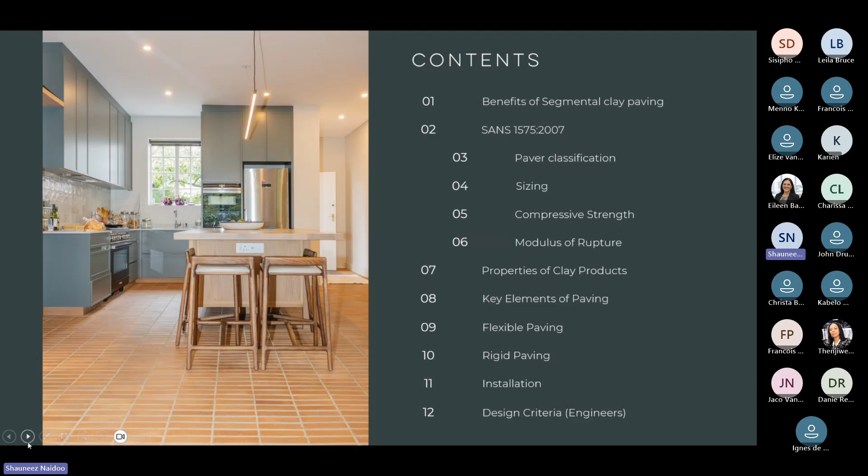So the benefits of clay segmental paving. Just like our normal face bricks, we're talking about clay as a product, and there are so many benefits. I can talk for days about the benefits of clay, but to mention a few: the natural and sustainable nature of clay as a product, the timeless and aesthetic appeal it gives, and the rich and permanent fade-free colors that we are able to offer. It also boosts your property value, as well as offering versatility, as you can use it both indoor and outdoor. Maintenance will always be a very big pro of clay - it's maintenance-free, resistant, and naturally slip resistant, as with our pavers. There are endless properties we could go on about for days.

So SANS 1575, we're going to cover that in about 3 slides. What is SANS 1575? It's the South African National Standard for burnt clay paving units. SABS is the South African Bureau of Standards, responsible for regulating the quality of South African goods in terms of the SANS 1575 standard.

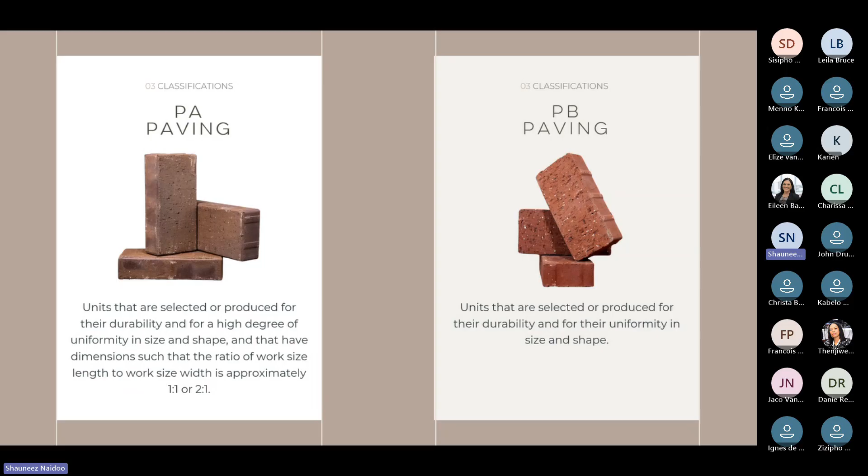So, which is very important, is the different classifications of your paving. We've got 2, your PA paving as well as the PB paving. The PA paving units are selected or produced for their high durability and degree of uniformity in size, shape, and dimensions that work in a ratio of length to width of approximately 1:1 or 2:1. Our PB range is basically units that are selected or produced for the durability and for the uniformity in size and shape.

So the difference between the 2 units, according to SANS 1575, which is not a Corobrik standard: with regards to the PA, the units may have chamfered arrises, and the chamfer or sloped arris should be less than 7 millimeters from the nominal edge. The PB pavers shall have a uniform arrises that are not chamfered, and they also have spacer nibs, which are vertical protrusions on the faces to maintain joints of less than 3 mil.

We purposely include this in our manufacturing process to allow for that joint, so that pavers are not butt jointed against each other, allowing for flexibility and movement. Units must be well fired and free from cracks, edge and corner damage, and this applies to both the PA range and the PB range. Specifically on the PA range, SANS 1575 says it has to have or may have a chamfered arris, but it's also available in straight edges as a specific request.

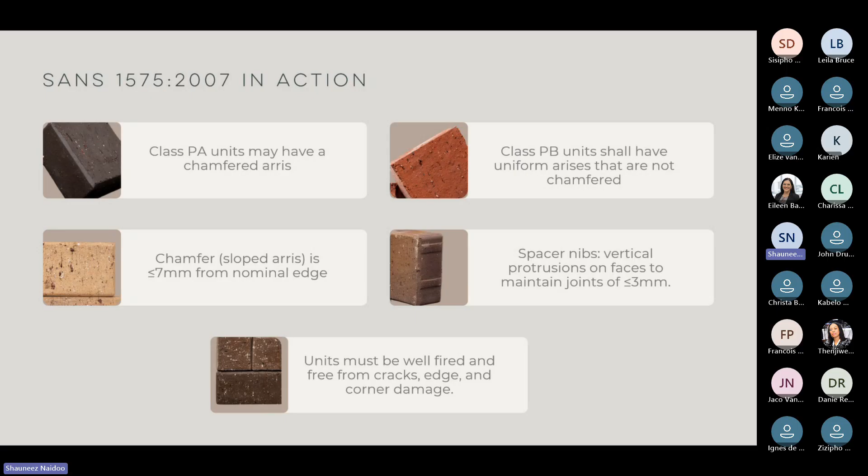So we'll go into the sizing of the 50 millimeter paving range. Basically, we've developed our pavers to be completely modular so that all pavers are interchangeable with each other. We'll start off with the doppio, which is 220 by 220 millimeters, as well as the modular, which is 220 by 108.5. So basically 2 modular pavers make up 1 doppio.

And then we've got the piazza, which is 220 by 52 millimeters, and 4 piazzas make up 1 doppio. Then we've got the cobble, which is 108.5 by 108.5 millimeters, and 4 cobbles make up 1 doppio, and 2 cobbles make up 1 modular. So you can see, you can play around with your layouts and you can go crazy. All these formats are available in the full range of paving.

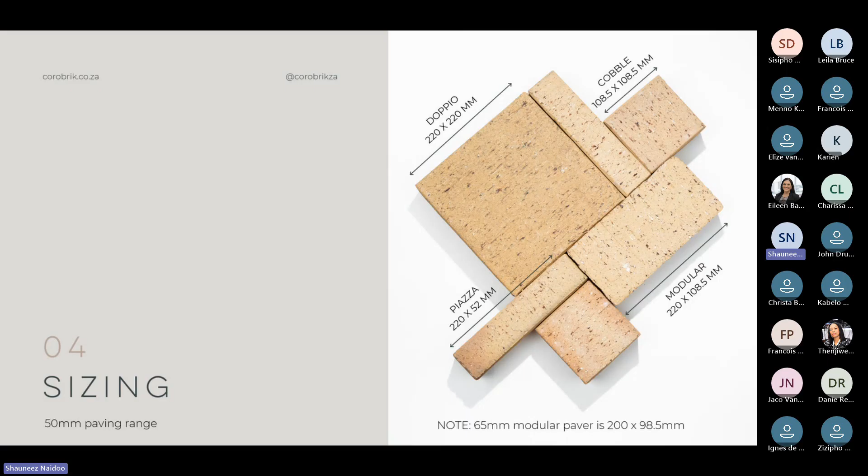So we'll touch on the size tolerances, which is for the PA as well as the PB, and this is similarly explained in the Facebrick ranges with your FBX, FBS, and FBA range. With regards to your PA and your PB, it is always important to account for these variances within the pavers, or the tolerances. With your PA, you have much tighter tolerances than your PB. What they state about the warpage is that it should not exceed 3 millimeters on a PA unit.

For PA, we don't really look at the individual units, we look at the average dimensions of 32 units. So with a PA, you are allowed to vary plus minus 2.5 mil in length, plus minus 1.5 mil in width, and plus minus 1.2 mil in height. And then for PB, it's plus minus 3 mil in length, plus minus 2 mil in width, and plus minus 2 mil in height. So you can see that variance.

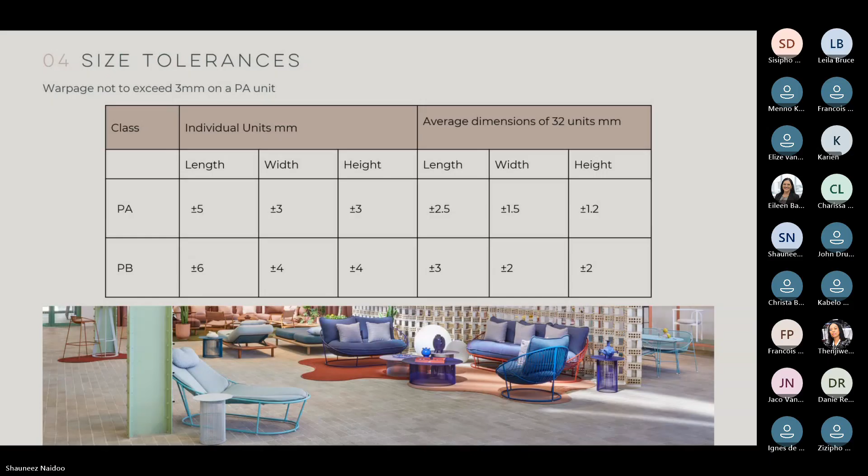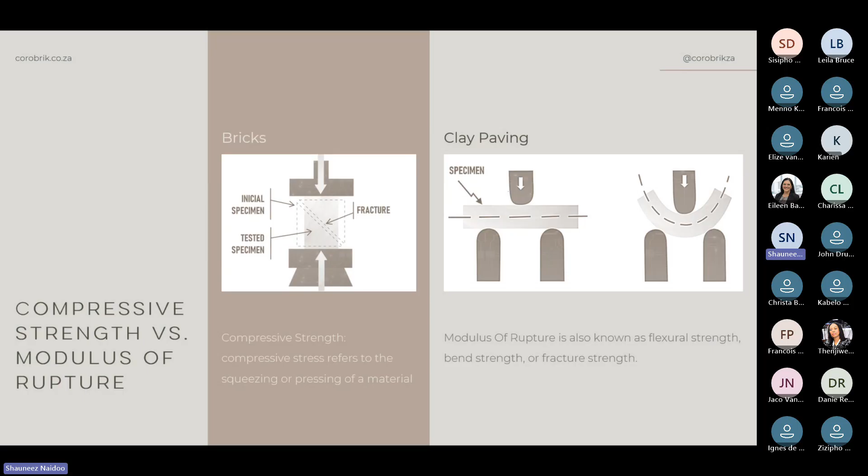Compressive strength versus modulus of rupture. A lot of other suppliers in the market test their pavers by compressive strength, and we do it by modulus of rupture. Compressive strength refers to the squeezing or pressing of a material, and we do compressive strength tests for our bricks. For the clay pavers, we do modulus of rupture, which is also known as your flexural strength, your bend strength, and your fracture strength, and that's obviously important for us when we're testing our clay pavers.

With regards to the modulus of rupture for PA pavers, the nominal modulus of rupture is 4 MPa, and the minimum individual modulus of rupture is 2.5 MPa. For PBs, it's 3 MPa for nominal modulus of rupture, and the minimum individual is 2 MPa. Everyone will obviously question that that looks a bit low, but you must just remember we're testing modulus of rupture.

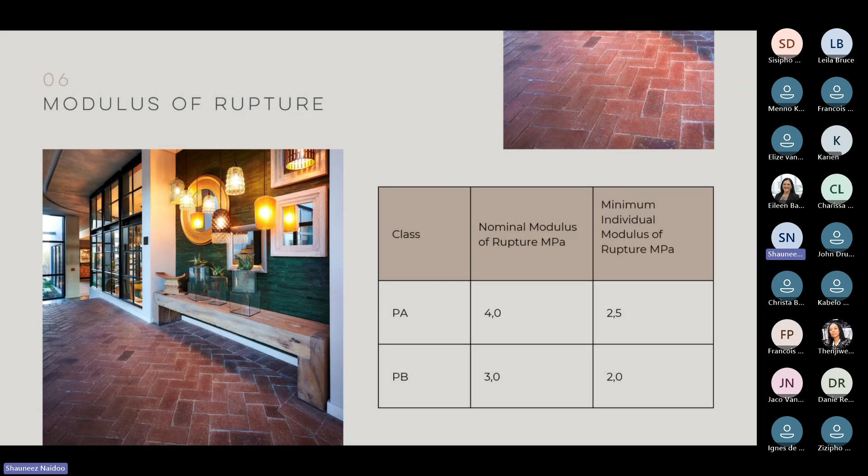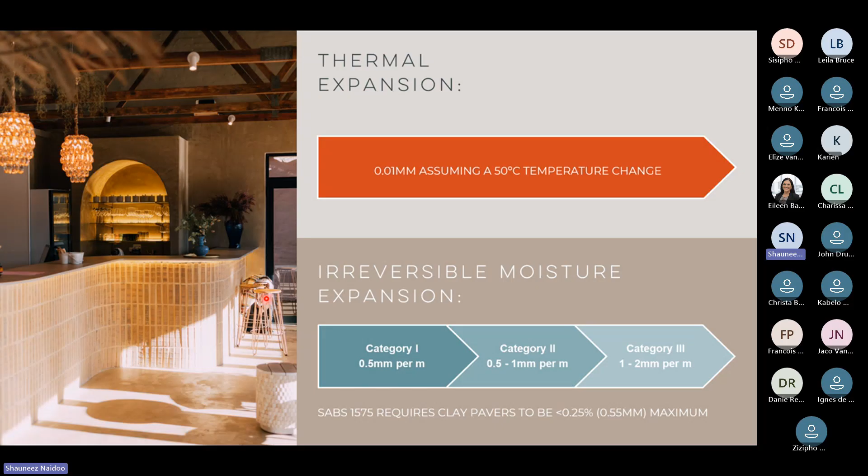The categories are divided into category 1, 2, and 3. Category 1 is 0.5 millimeter per meter. Category 2 is 0.5 to 1 millimeter per meter. Category 3 is 1 to 2 millimeters per meter. Remember, this is not our standard - this is the SABS 1575 standard.

Efflorescence - when you download a specification sheet, you will be given a degree of efflorescence. It will state either nil, slight, moderate, heavy, or serious, depending on the degree. Efflorescence is just a soluble salt. It is erroneously assumed to come from the brick or the paver, but we can test based on the specification sheet what exactly the efflorescence rating is.

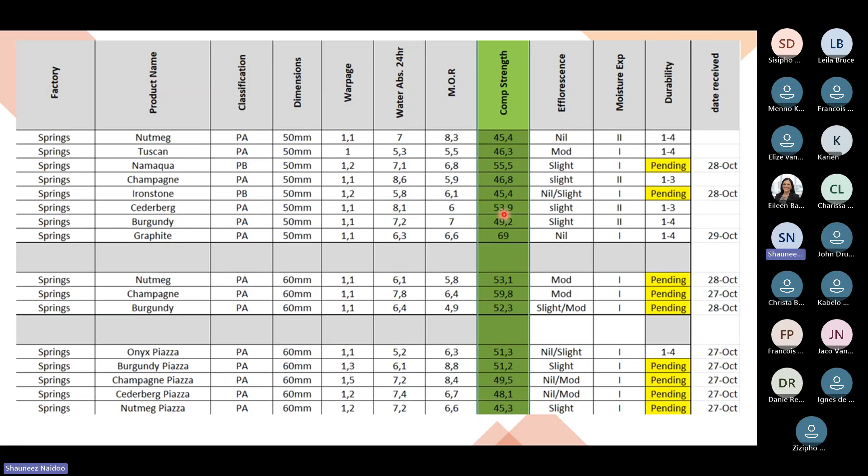We've got an independent lab that can test exactly where the efflorescence is coming from. Efflorescence is not permanent - it fades over time, and we know how to treat it. It's basically just dry brushed away from the building, because it is a soluble salt. If you wet it, it will literally just dissolve, and over time dry and settle again. So we do have a way to treat efflorescence if it's coming from the pavers. If it's coming from the soil or sand, we look at those sources.

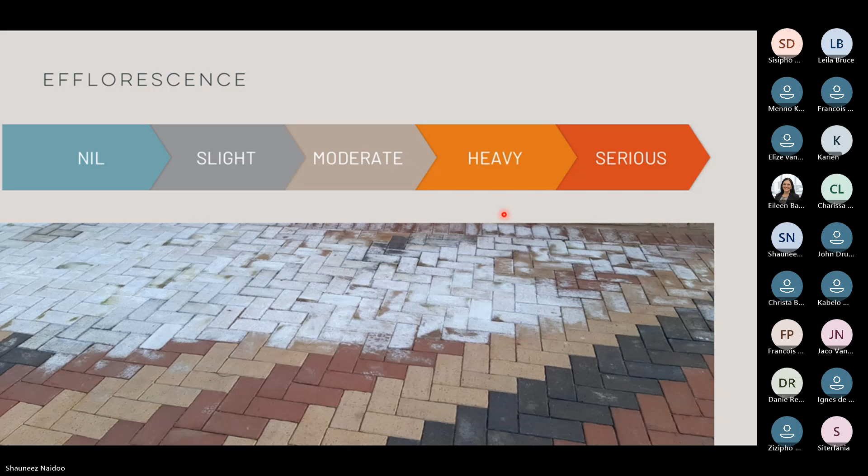The key elements of paving, from the ground up - you're designing from the ground up. It is the designer's responsibility to evaluate the in situ soil conditions and the sub-base requirements based on the loading considerations. Do not install plastic sheeting under the paving.

It's an old mentality that is deemed acceptable, but it is not correct. Do not install plastic sheeting. If you do see this on site, bring it to your contractor's attention and flag it, because it is not correct.

The jointing sand is not the same as your bedding sand. Looking at your layer works - your sub-base is the imported material used where the subgrade is poor quality or traffic load is heavy. Your subgrade is your in situ soil, the natural earth found on site. The wearing surface will depend on your actual product and surface product.

Edge restraint holds the paving in position and prevents horizontal creep. Weed growth is accommodated for with a weed killer, not a plastic layer. There are products on the market to treat your weeds and kill them, rather than installing the traditional old mentality of a plastic sleeve. Do not do that.

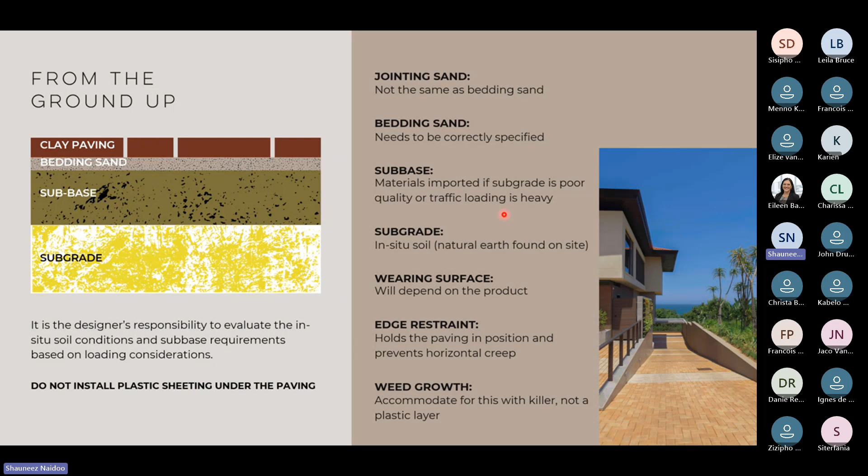Working on steep gradients requires special measures to ensure stability and controlled movement. To support effective drainage, you require an edge restraint, especially at the foot of the gradient. Transverse concrete beams may need to be constructed, and your bond pattern should be 45-degree herringbone to aid with the drainage.

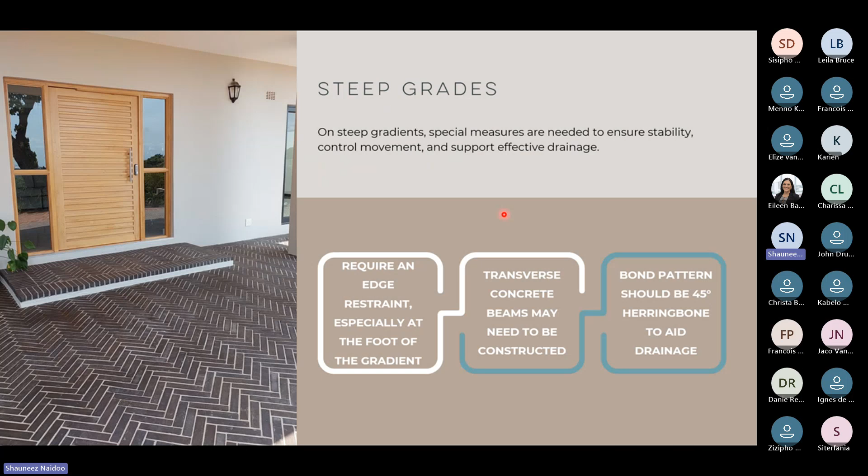For trafficked paving or trafficable areas, within the ranges we've got the 50 mil, specifically for pedestrian and light vehicle traffic. Then we've got the 65 mil, for heavy vehicle traffic up to class E2 loading conditions.

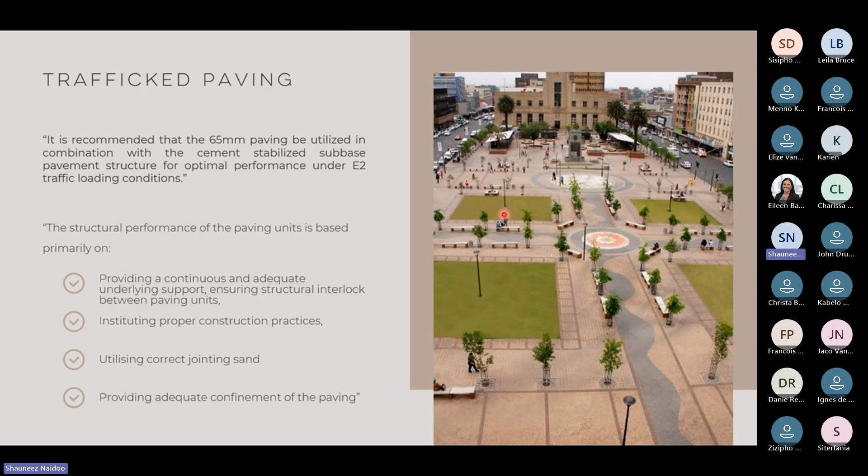The structural performance of the paving units is based primarily on providing continuous and adequate underlying support, ensuring structural interlock between the paving units, instituting proper construction practices, and utilizing correct jointing sand, as well as providing adequate confinement of the paving.

So we mentioned we'll discuss the difference between flexible and rigid paving methods. If you look at the design layer works, the main difference is with flexible, you've got your subgrade, sub-base, bedding sand, and clay paving as your surface. With rigid, you've got your subgrade, cement stabilized base, bedding course, and clay paving. So the main difference is the bases. With rigid, you have to have a cement stabilized base.

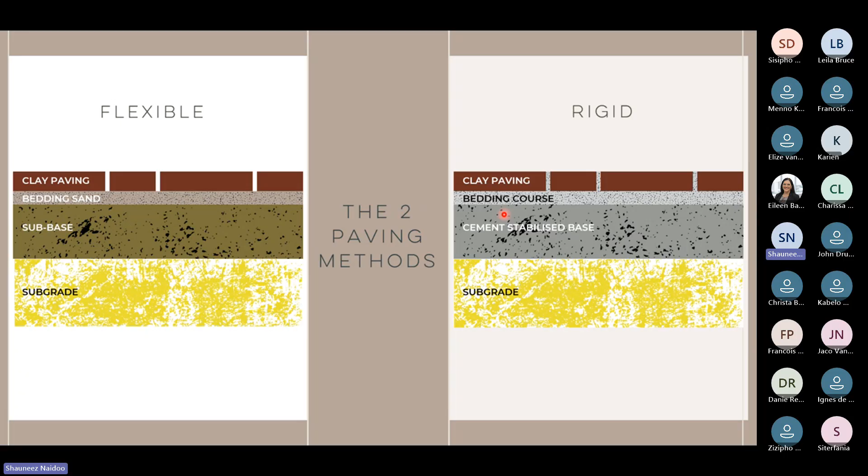So what is flexible paving? A pavement system comprising a wearing surface, fired clay pavers laid with a 2 to 6 millimeter joint filled with fine sand, on a bedding course of sharp sand and a granular sub-base or improved subgrade. So it requires sand bedding and sand jointing, not the same sands. That is very important - we know contractors take shortcuts.

Performance depends totally on the adequacy of the overall system and not on the wearing surface alone. A lot of times we'll be called to site because the pavers are failing, and when we look deeper, it's actually the sub-base that's failing. So flexible paving should be the first choice for structurally demanding conditions.

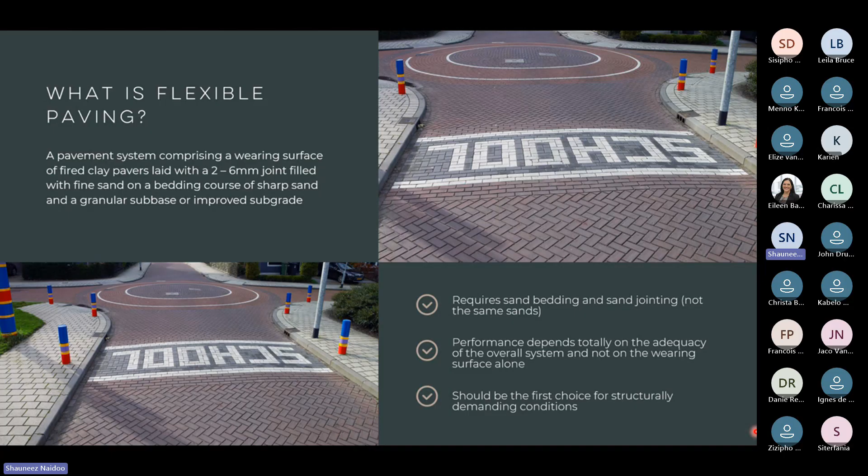The role of jointing: extensive studies have shown that the essential element for effective flexible paving is the provision of proper and effective joints. We need to provide the necessary interlocking of the paving units - that's the role of the jointing. It provides macro resistance to skidding wheels, generates horizontal forces between individual pavers by means of volume increase, and accommodates for size tolerances of the individual paving units. That is very important because we often find pavings being butt jointed, and that is an incorrect installation.

So with the tolerances, you'll obviously accommodate for this within your jointing sand. Properly constructed joints around each paving unit provide for moisture and thermal movement that we also spoke about, so it is very important that we accommodate for that. It also avoids damage through abrasion, which is when the pavers rub against each other.

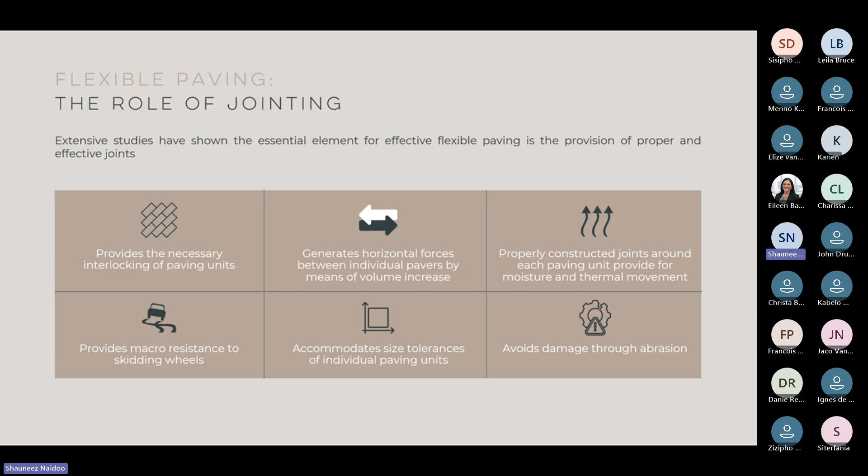Your bedding and jointing sand are not interchangeable. Your bedding sand is a thin layer of sand coarser than your jointing sand, and must not be used to correct sub-layer levels. Very important - it should be as thin as possible to avoid potential rutting. So 30 millimeters uncompacted, then 25 millimeters compacted.

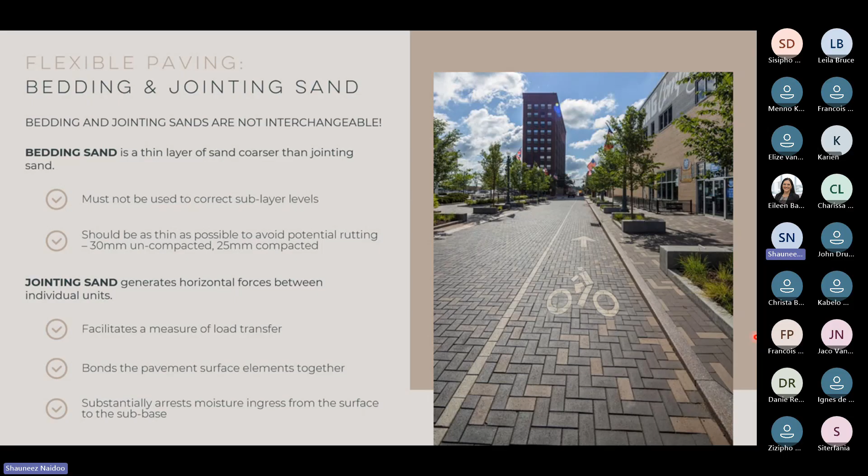Your jointing sand generates horizontal forces between the individual units. It facilitates a measure of load transfer and bonds the pavement surface elements together, and it substantially arrests moisture ingress from the surface to the sub-base, which is also very important. So you do need these different sands.

With regards to rigid paving, this comprises a wearing surface of clay pavers laid with an 8 to 12 millimeter, average 10 millimeter mortar joint, on a mortar bed over a rigid load-bearing base, usually a concrete slab or concrete base. We spoke about that with the different layers of rigid and flexible.

So the design principles are similar to those of a cemented pavement. No structural contribution is expected from the pavers.

Shame, the baby's not enjoying this.

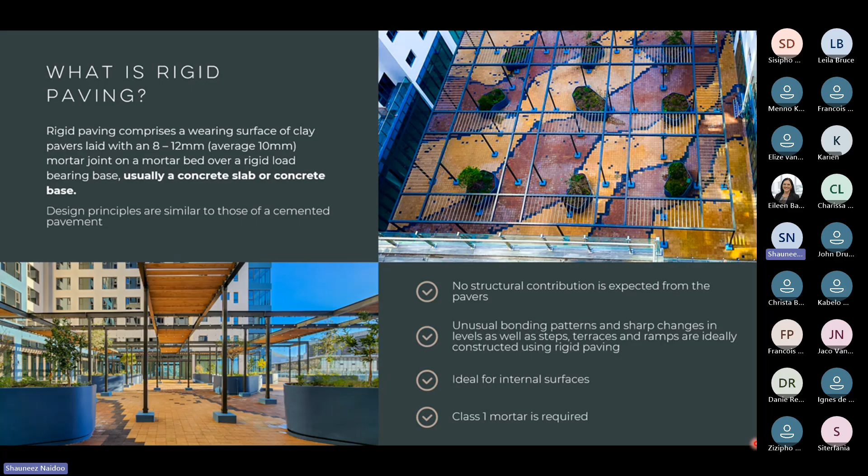So we have unusual bonding patterns and sharp changes in levels, as well as steps, terraces, and ramps, which are ideally constructed using rigid paving. And it's ideal for internal surfaces where class 1 mortar is required.

So the base of rigid paving - flexible bases of compacted earth or crusher run are not recommended unless stabilized with more than or equal to 6% cement, suited to the loading. A typical base is 100 to 150 millimeters of 10 MPa concrete base, depending on design needs.

Your concrete jointing is unreinforced concrete requiring a movement joint every 4.5 meters. Alignment matters - your joints should coincide with the structural joints in the concrete base. Your movement joints are placed around the perimeter and fixed elements, which is your pillars, drains, and along the buildings.

Your paver jointing is expansion category 1 - pavers require a movement joint every 9 meters, which should run vertically through the base layers and wearing surfaces.

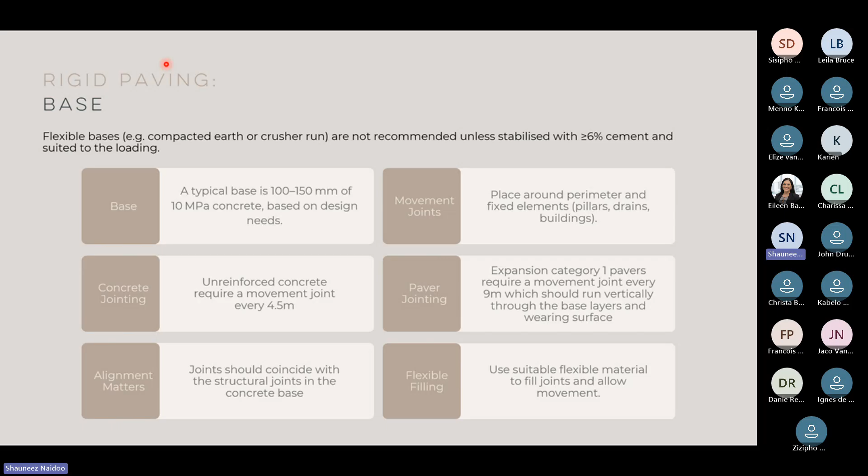Then we move to the drainage and the edge restraints. Quick clearance of rainwater and avoidance of puddles is essential. Rigid paving is sufficiently impermeable, so subsurface drainage is generally not required since you have that concrete surface. Surface drainage must still be provided, with an optimum fall of 1:60 and a minimum requirement of 1:100. Straight falls to an open channel offer the simplest drainage solution. For edge restraint, the easiest method is to extend the slab and lay your bricks on edge.

With regards to laying and jointing for rigid paving, intimacy of the pavers to their joints and bedding is essential. Bedding and joint filling as a single operation provides the best durability. Bond the header course to the slab. The bedding layer consists of 15 to 20 millimeters of the specified mortar, generally class 1, and a semi-dry mix can be used as a bedding course. To promote adhesion to the bedding course, a 2 millimeter slurry of 1:1 fine sand and cement can be used. Butter the paver and push it into the mortar bed. Completely fill your joints with mortar or cement slurry using fine sand to ensure the gaps around the pavers are filled, and we always advise cleaning the pavers thereafter.

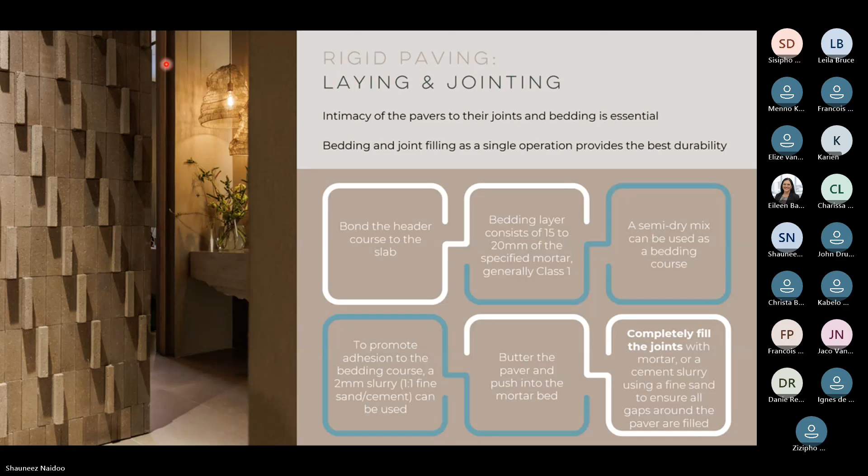Pave your way to success. Don't forget these: a chip is no more than 10 millimeters in depth and 25 millimeters in circumference, with no more than 5% allowed, according to the Brick Paving Institute.

Tires leave marks on any type or color of paving.

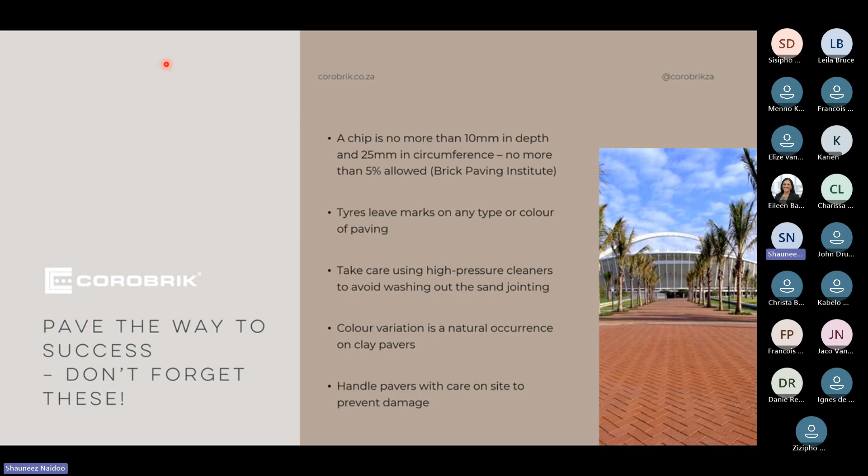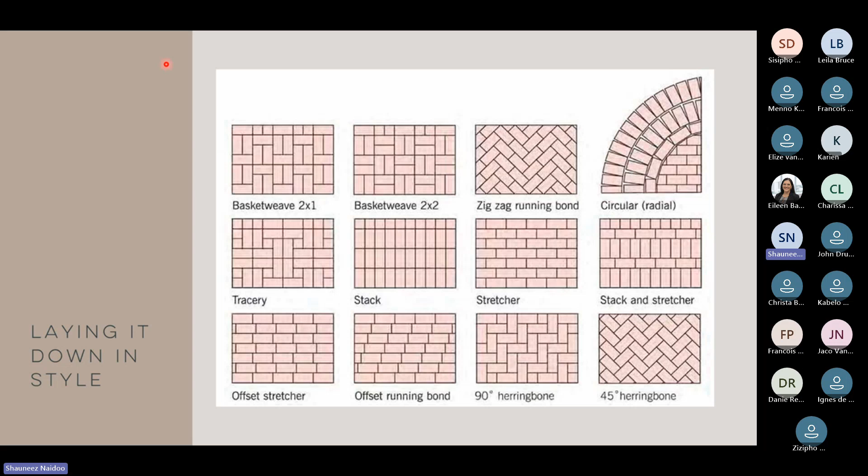Installation - you can see there are countless possibilities and types, but the common ones are basket weave 2:1, basket weave 2:2, zigzag, running bonds, circular radial, stack, stretcher - these are your very common bonds. We also see your 45-degree herringbone, very trending currently, as well as your 90-degree herringbone.

Practical considerations for your running or stretcher bond: the long axis should be laid at right angles to the direction of traffic. Your stack bond and basket weave are very linear and require a high level of workmanship. So if you are struggling, or worried about your contractor not being able to achieve your beautiful designs and layouts, let us know.

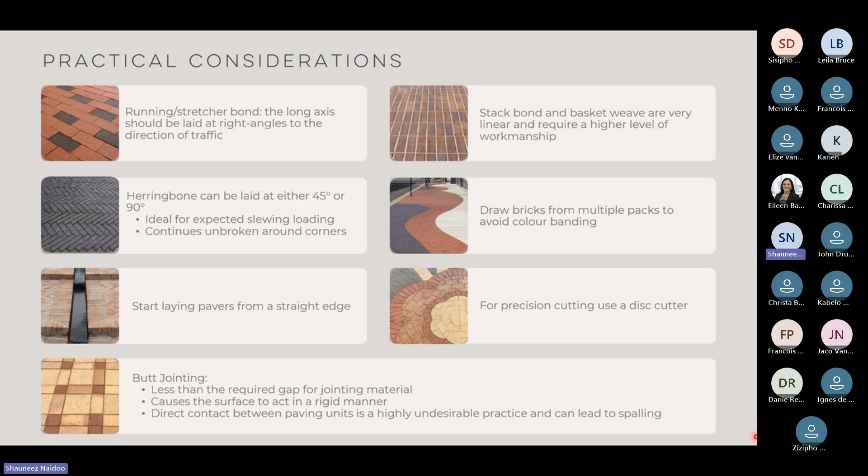Let me just check my time. Okay, we're still doing good.

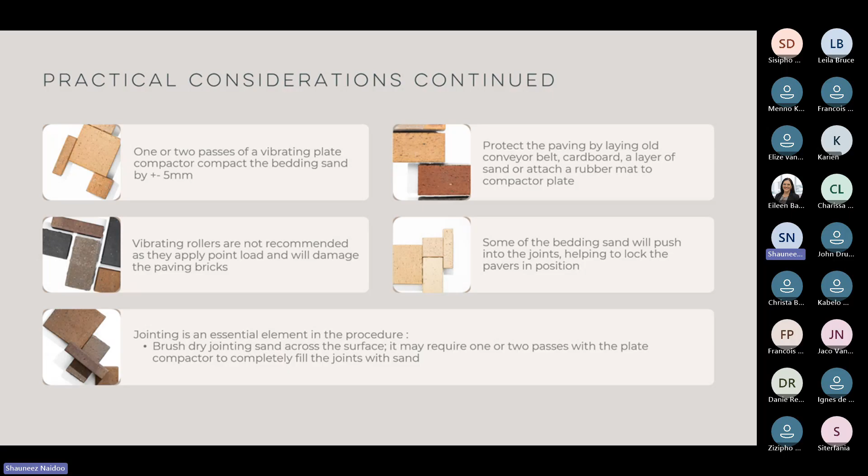Some of the bedding sand will push into the paving joints, helping to lock the pavers in position, which is a good thing. Jointing is an essential element in the procedure. Brush dry jointing sand across the surface. It may require 1 or 2 passes with the plate compactor to completely fill the joints with sand.

Then the design criteria, which is also very, very, very important. This can also be overwhelming, but it will be shared.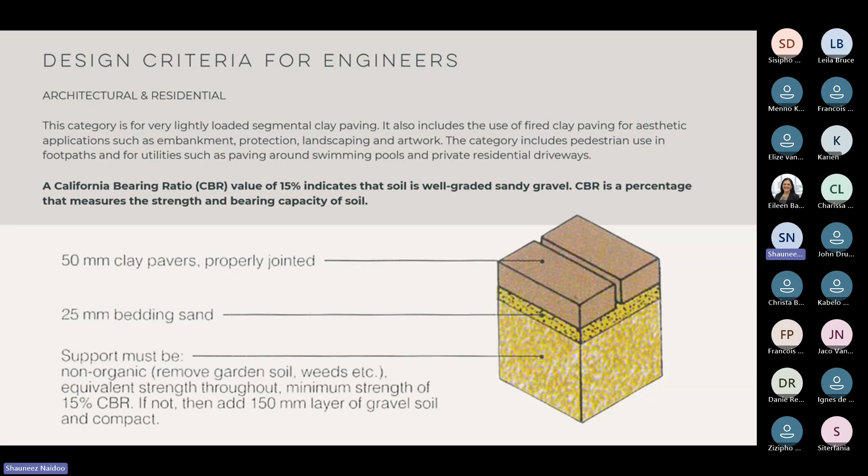This is a simple design: 50 millimeter paving, properly jointed, with 25 millimeter bedding sand, and then your support must be either a non-organic equivalent strength throughout, a minimum strength of 15% CBR. If not, then add a 150 millimeter layer of gravel soil and compact.

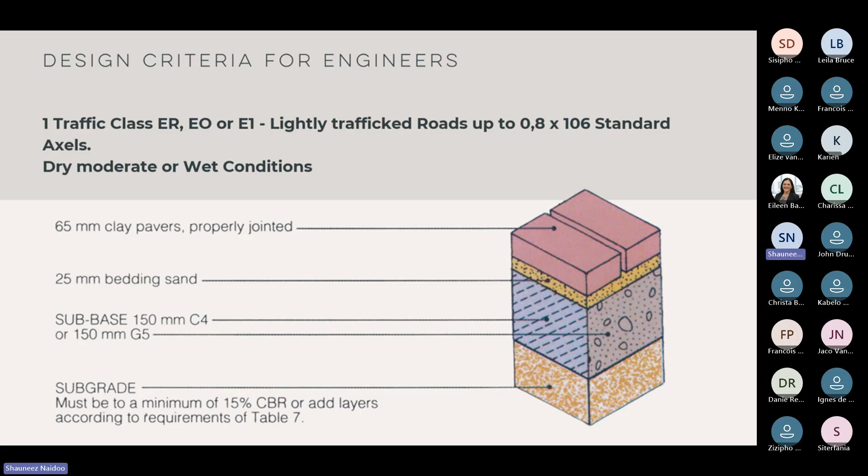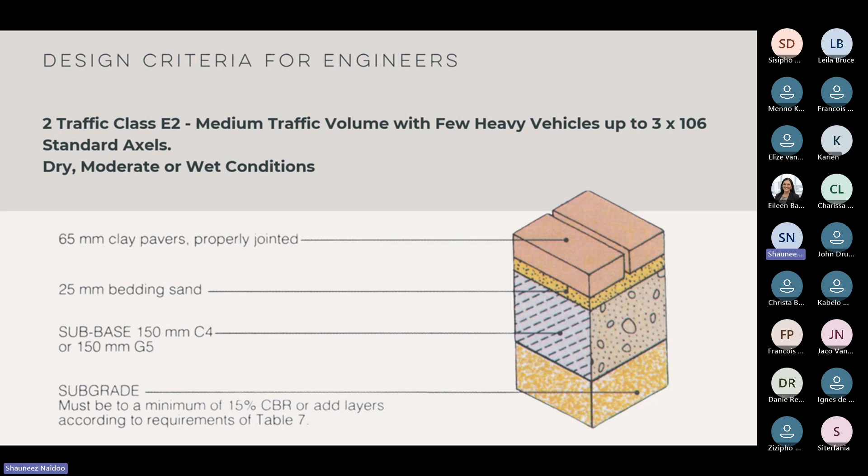This is similar but for dry and moderate or wet conditions as well, for class E2, and then we've got class E3. You can see how the bases change every time. So your design is from the ground up. The pavers are just the decorative part; your sub base is very, very, very important.

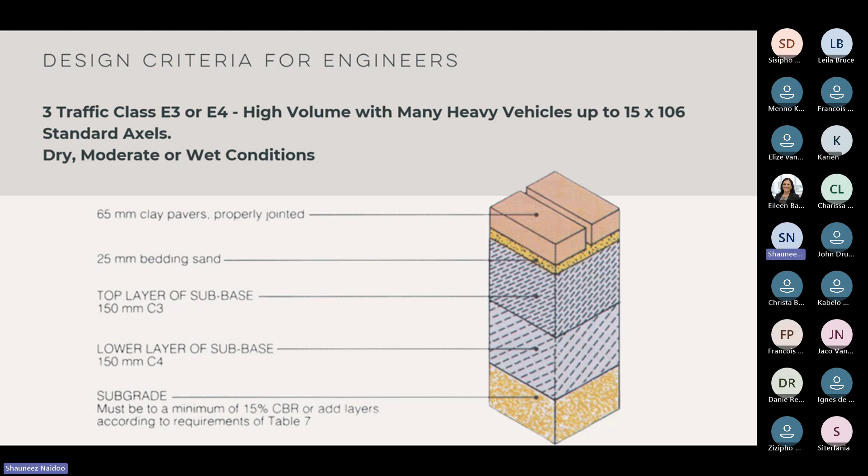So this is the 65 millimeter properly jointed with 25 millimeter bedding sand, your top layer of sub base, your lower layer of sub base, and then your subgrade. Similarly for class E3 or E4, high volume with many heavy vehicles, every time your vehicle increases axles, your sub base is designed accordingly.

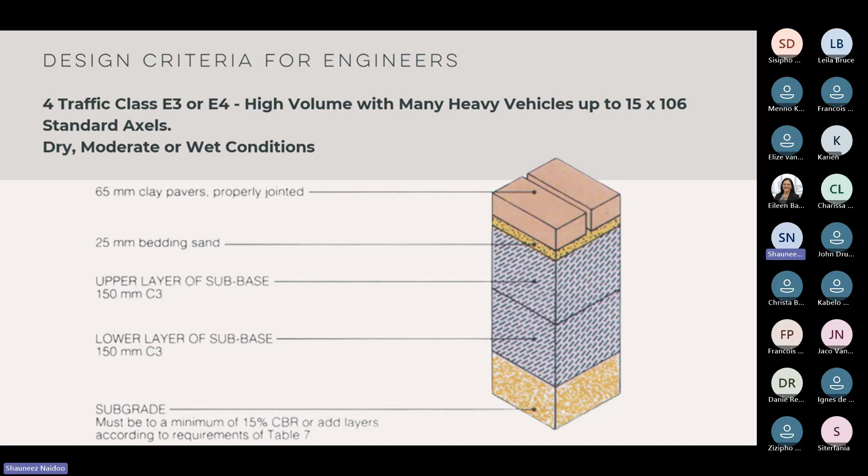So like we mentioned, design from the ground up. Now the various colors or range within the paving. We always develop all of these colors with an architect, a landscape architect, or an engineer who says, can you do this? Will you try this? This is how most of the colors have been developed.

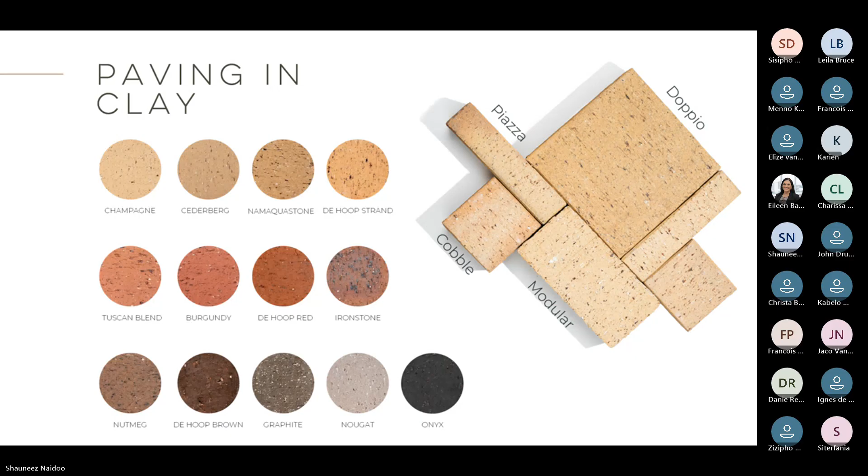We've got this new paving called the pool nose, which is specifically for pool areas. It's got the bull nose, and it's also got a section or groove for your LED lighting around the pool areas.

And that is it. Sure, I don't know if I raced through this. Eileen, are our people still here? Are they? They are still here. Does anybody have any questions? You're welcome to unmute yourself and ask any questions.

I just want to share one more thing, if you don't mind. Sure. Even my—

Yeah, sure guys, can I get a thumbs up or a thumbs down? Were you guys able to follow me? I thought we wouldn't get through this, but we actually did very well with time, so I think your families won't be too upset with me.

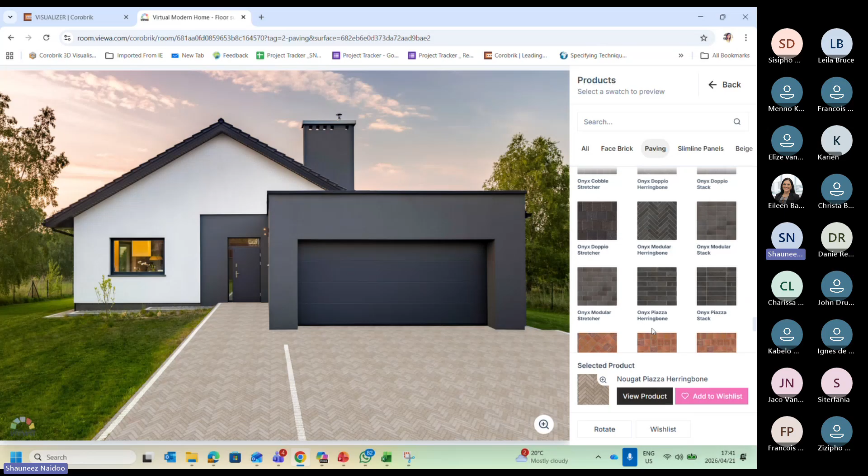Basically you would upload your own design. I've just uploaded a standard design, and you can play around with the colors and just see what it would look like in perspective. I'm not an architect, but you guys will know, or a landscape architect, what you want—if you want to do a contrast in colors, if you want to complement your colors and incorporate different modules in one, and just play around.

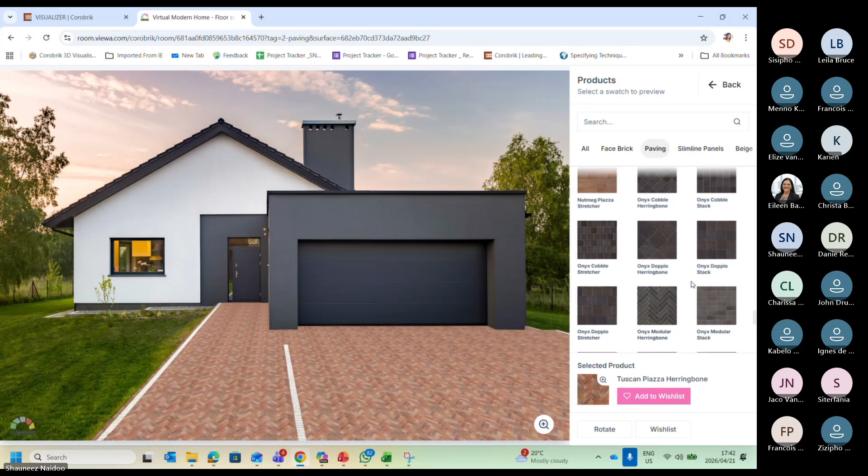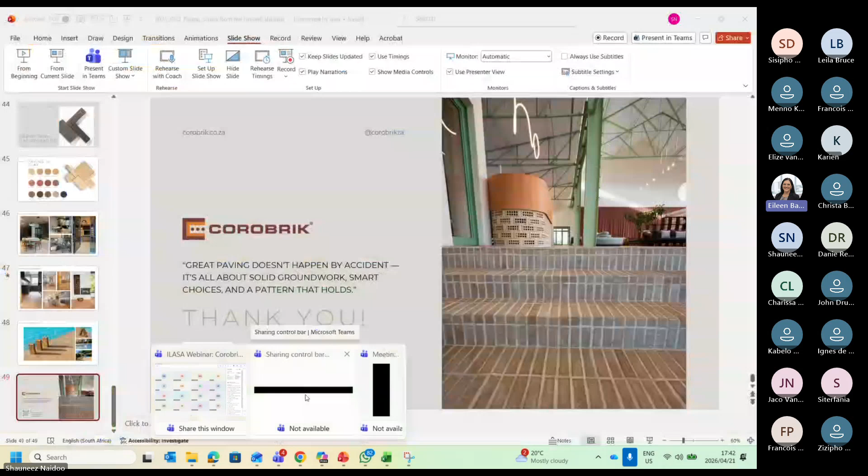Okay, do we have any questions? So we have another question from Elize. She asked, can you give installers a certificate saying they've completed your training and are a preferred installer for Corobrik? I love that question, because yes, we definitely give them certification.

Immediately when we go to site and show them how to work with our product, they get certification. We have 3 brick schools available nationally, where if they attend the full 6-week course, they also get certification. As for being a preferred installer for Corobrik, this is exactly what we're looking to build - a database of installed contractors. We'd be very happy to include them in this list, because we often get asked if we have an approved installer. Generally our paving is very user friendly, but this is exactly what we want to build so you have a reputable contractor to go to, and the list will be available from us.

Thanks so much. She said that would be amazing, because then we know the installers will do it right with no comebacks. Are there any further comments or questions?